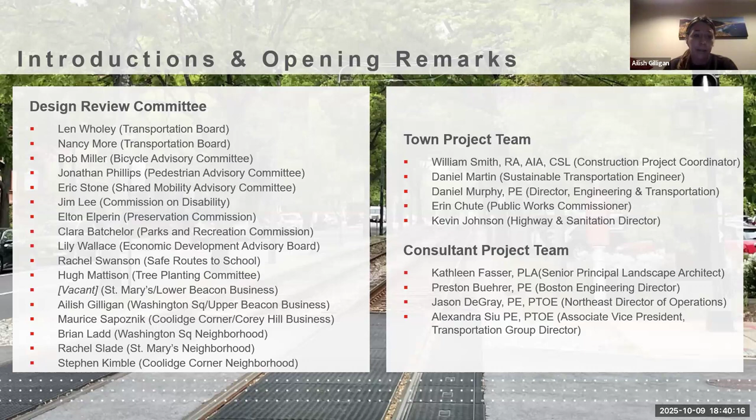Any other online members want to introduce themselves? Ailish Gilligan here, owner of the Public House on Beacon Street in Washington Square. I also live in Washington Square and am chair of the Small Business Development Committee as well.

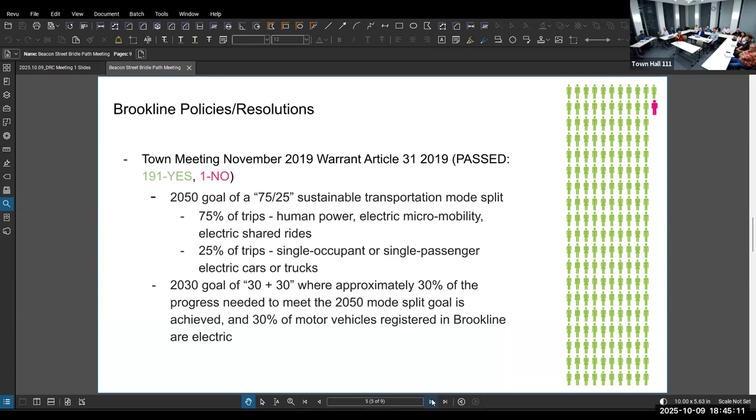But in order for us to realize those transportation goals, we need to address safety. A lot of people who ride bikes here mentioned they don't necessarily feel safe riding on our streets in Brookline, and there's reason for that. There are over 1,000 car crashes in Brookline per year, with over 100 resulting in injury. 30% of those injured are either people riding a bike or walking. So we have a lot of work to be done, and I think the bridle path is one step in the right direction.

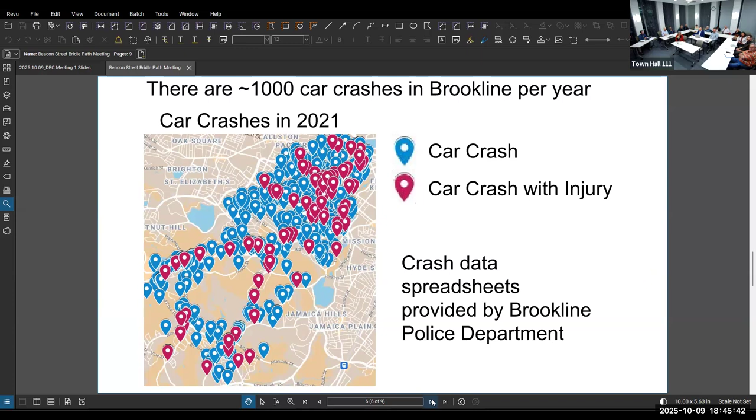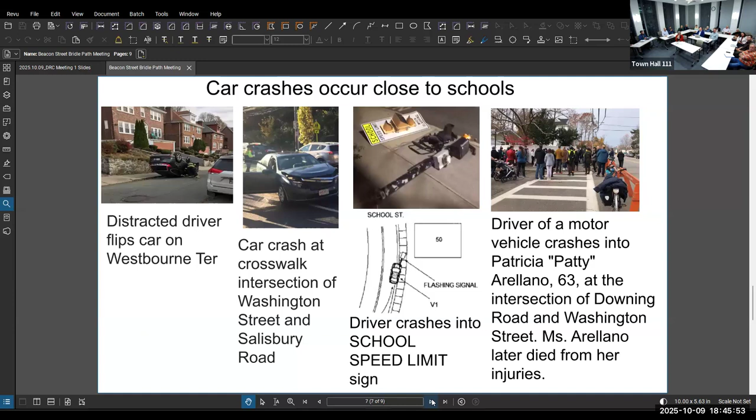Car crashes occur in close proximity to schools. There are a few instances where what's happening on the streets is just terrifying.

We can look to other countries as an example. France wants to be climate neutral by 2050, and they're taking action to realize that. In Paris, they've cut pollution in half, in large part due to significant changes to their streets and infrastructure to encourage cycling.

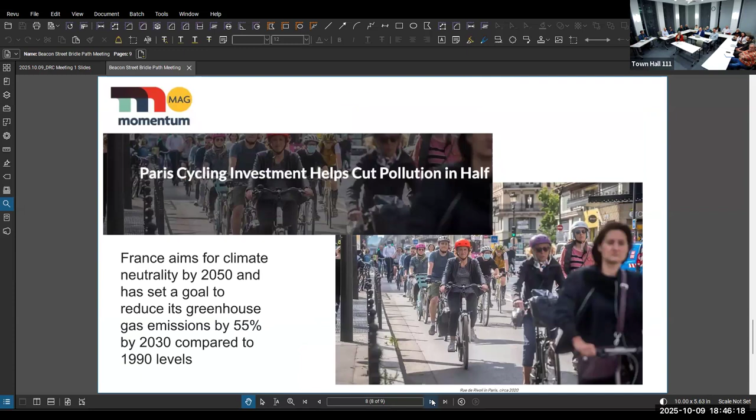I think Brookline is a place that sets goals and then achieves them. I think the Beacon Street Bridle Path will help us achieve our climate-related goals and also make kids safer and happier. I look forward to working with you.

Let me speak briefly to the town of Brookline's project team. Beacon Street is a public way, the nation's first intentionally designed multimodal corridor, designed by the Olmsted firm in the 1880s, and went through a lengthy public process of takings and widening of an earlier 1851 county road.

For this project, Brookline DPW brings an amazing array of support at the staff level. We have architects, landscape architects, engineers of various sorts, arborists. This will be a powerful support tool for the team and the public, because staff will provide significant technical advice. I think we'll be facilitating a lot of the public outreach and guiding the approval process through the different boards and commissions with jurisdictional interests along Beacon Street.

About the design team: we were very fortunate to be the recipient of a federal earmark, thanks to our legislative delegation, at a $2 million level. This, in addition to a town match, allowed us to go out in a public request for proposal process, in which Toole Design and their subconsultant HNTB emerged as the clear strong winner, and we were able to award the design contract to the team. We look forward to working with Toole, who has a national reputation for exploring alternative transportation modes, specifically bicycle and pedestrian, in all sorts of conditions and contexts.

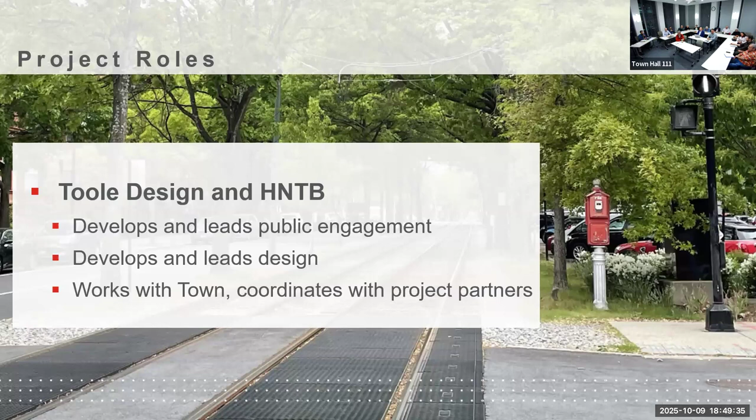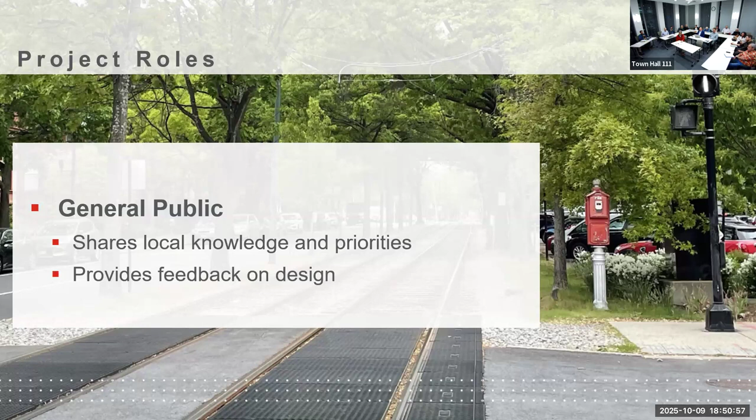I just want to emphasize the importance of public input. Each of our design review committee meetings will be open to the public. They'll largely be hybrid, so there will be the opportunity to attend in person or remotely if necessary. At each meeting, we'll have a public input or comment portion, either at the end or strategically placed within the context of the presentation.

Over the past several months, staff and Toole have been intensely engaged with MassDOT through their project review committee to gain acceptance of the Bridle Path project as a transportation improvement project in the Commonwealth of Massachusetts.

What this will ultimately do, we hope, is provide much needed construction funding for this project. So we're now in that universe.

Mass DOT Highway is the agency that facilitates the TIP process, and will be, together with the design review committee, working to develop what is called a 25% level plan set - plan specifications and a cost estimate developed to a 25% level that is submitted to Mass DOT for their review and approval. We'll have an opportunity to reply.

The result of that is a design public hearing that Mass DOT will hold in Town Hall and invite the public. In preparation for that, public support is key. They hope that the town has worked through any issues by that point at the design public hearing.

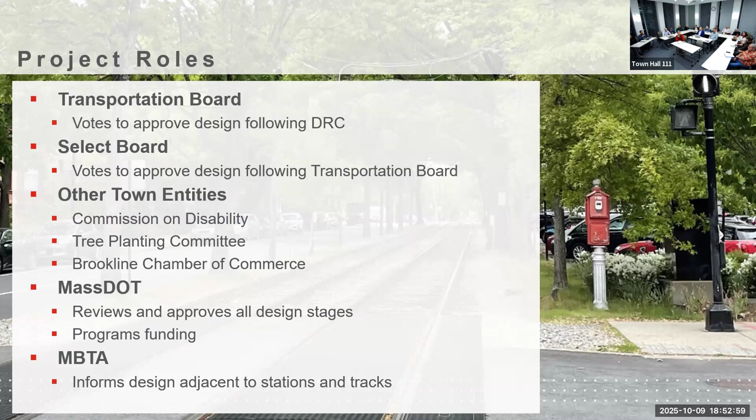So it will be important for us to have worked through the jurisdictional boards and commissions relevant on Beacon Street, such as the Tree Planting Committee, the Preservation Commission, the Transportation Board, and ultimately the Select Board. Next slide.

We'll turn this over to my colleague, Dan Martin. Sure. So the feasibility study was finished in 2021, and since then we've had a lot of new inputs that have come in.

The MBTA station accessibility improvements - they're widening 7 of the platforms to make it accessible and easier for train riders. So that's something we're considering now.

And right now there's also a survey, so all of Beacon Street is being surveyed: utilities, curb line, trees. We're also gathering parking data, traffic movements, parking utilization, and all that is going to be used to help come up with a design for this project.

On the next slide, I wanted to talk about the overview and the feasibility study. A lot of this was already covered earlier, but it did begin quite a while ago. In 2018, there was the town meeting warrant article, which was the non-binding resolution that called for the feasibility study on Beacon Street. This really started as a grassroots movement.

Jules Milner, who's in the audience here, used to be a Brookline resident. He championed this effort. He's since moved, but as you can see, he's still very interested in the project.

Then in fall 2020, the feasibility study looked at a number of options, and it took into its work looking at data, traffic volumes, stakeholder engagement, coordination with the MBTA, and then there was broad participation with town departments, advisory committees, boards, business representatives, and community advocacy groups.

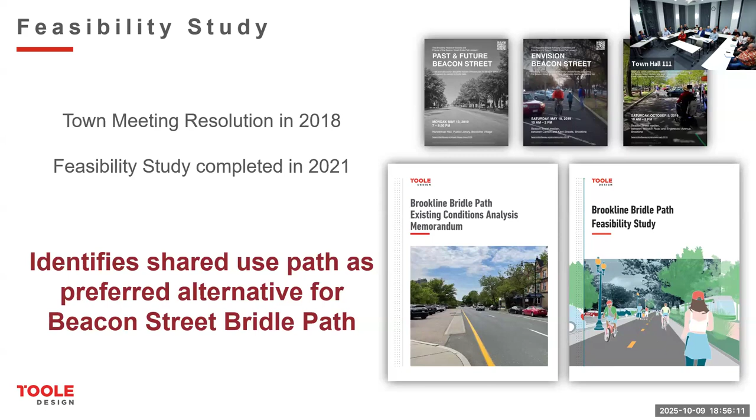With that in mind, I'm going to start with the feasibility study, recap some information from that, talk a little bit about existing conditions. Dan mentioned some new projects that will change our existing conditions, and then we'll move on to the design process and the engagement process that is to come.

Starting with the feasibility study, we're going to look at a couple of cross sections from that. This comes directly from that study, and this is typically Beacon Street today. I think we're all very familiar with it, but again, just to make sure we're all operating from the same frame of reference - we have Beacon Street starting left to right here.

On the left side, sidewalks - generously wide sidewalks, with a beautiful tree canopy along quite a bit of the sidewalk - parking in 2 travel lanes along the narrow side of the roadway. And then there's the center median, which is going to be the focus of our effort moving forward. That median includes the Green Line reservation, often buffered by those Olmsted tree canopy on both sides.

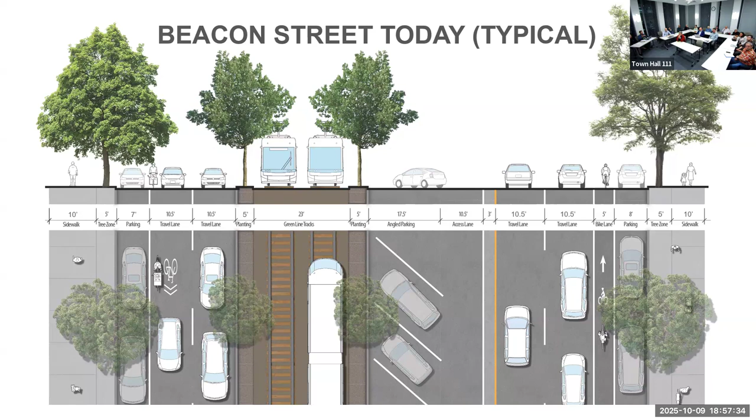Frequently on the wide side of the median, there's angle parking in an access aisle, sometimes with a concrete rumble strip buffer. Basically, there's a lot of space in the median between the MBTA tracks and the vehicle travel lanes. There's two more vehicle travel lanes. Frequently on the wide side of Beacon Street, there's a bike facility, unprotected next to parking, and then of course the sidewalks on the other side of the street.

As Dan mentioned, the feasibility study evaluated several alternatives and came to a preferred option for the Bridle path. This preferred alternative, in general terms, uses the wide side of the median to put in a shared use path and an additional buffer between the shared use path and whatever goes to the right of that on screen. As you can see here, the preferred alternative maintains the possibility to retain the angle parking that is in the median. We'll talk a little bit more about this in a few slides. And it maintains the two travel lanes on the right side of Beacon Street there.

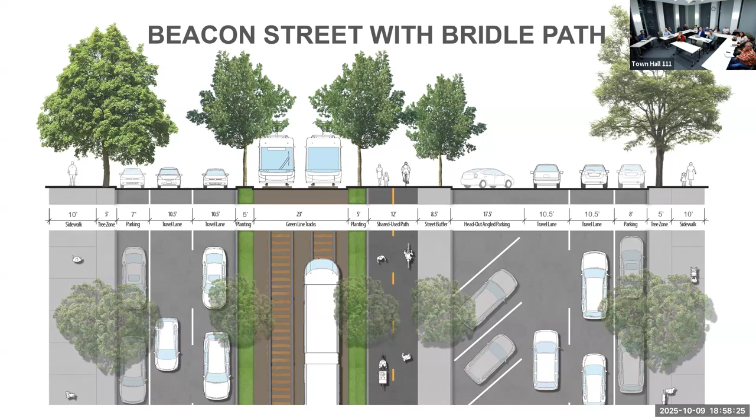So what does that look like along the entire length of the corridor? The feasibility study came to this concept plan, and I'm going to walk through the entire plan here in relatively quick fashion. It is online, it is available for everyone, and it is unchanged since this was published in 2021. But again, this will be our common frame of reference to start.

This section you see on screen here starts at the west end of the project limits over Ayr Road, right at the town line, and runs almost all the way up to Washington Square. On the right is a key plan, so you can see the part of the corridor we're talking about. You can see that we're breaking the corridor up into three sections to talk about tonight, which will also mirror how we are approaching the public engagement that is forthcoming shortly.

So a few things I want to focus on while we have the concept plan on the screen. The feasibility study was just that. It determined the feasibility of this project. It did not tackle nuanced design decisions. It identified many things that we have to consider, but it did not make concrete decisions about the nuances of design, aside from selecting that preferred alternative.

So when we think about things that are important along this corridor, things like trees, you can see the concept plan here does not detail anything in terms of where trees are, where trees might go, what might be impacted, what may be opportunities. That's in the cross section that is in the feasibility study report itself, but the concept plan doesn't get to that level. That's our charge here. That is what we get to grapple with. And we'll be collecting all the necessary data and talking about the design in those terms moving forward.

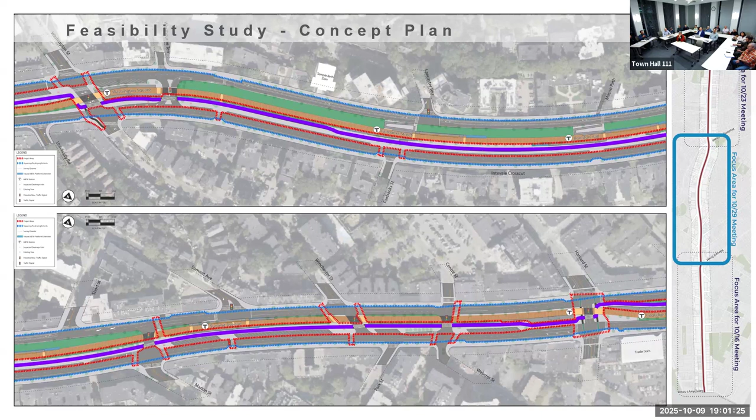Stepping through the corridor here, this section contains both Washington Square and Coolidge Corner. As we've cut the plan here, we know those are going to be our most challenging areas. I mentioned the path goes on the wide side of the median - the wide side of the median is determined by the MBTA tracks. Those tracks shift from one side to the other at Washington Square and Coolidge Corner. So those are areas where we know we're going to have to play around with some interaction between the path, the trolley, and traffic. There's going to be a lot going on. So just want to acknowledge that those are going to be real focus areas for us, certainly early on, as well as throughout the life of this project.

Continuing to walk through here to the eastern section of the corridor - I will note this is the first section of the corridor where we are going to be hosting a public talk and walk event this month. We'll talk a little bit more about those in the future, but just want to flag that this is where we'll be starting with the broader public discussion. A couple of other things I want to flag here that we know we're going to need to consider, but again, aren't necessarily represented on this concept plan yet.

We know we're going to need to think closely about access to the path, what those access points look like, where they are, what the treatments are that get people to and from this facility. We know we're going to need to think about pedestrian scale lighting to ensure this path is safe, welcoming, and just a wonderful environment at all times of day. We know there's quite a lot of utilities in the median that we're going to have to consider.

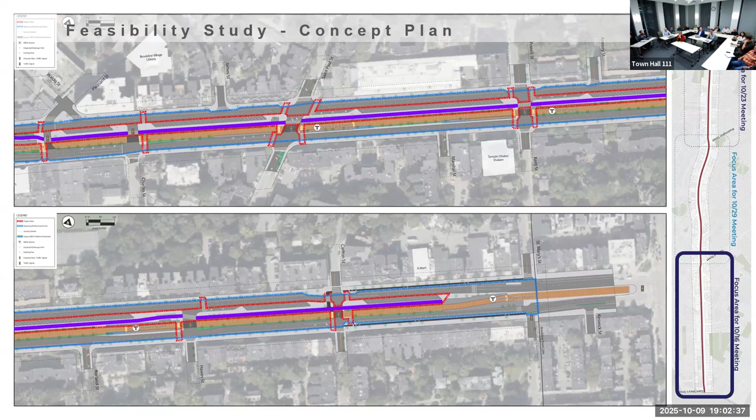There's a few other things I'll touch on in a little bit in terms of existing conditions, but I want to emphasize this as our starting point, a wonderful starting point, but just that it is what we get to build upon here. The feasibility study looked closer at some of these challenge areas. At Coolidge Corner, the most prescient thing from this image is just above and to the right of the Harvard Street intersection - those two westbound travel lanes where the path is. This is the tightest spot on the corridor, an incredibly challenging area for us to deal with. We recognize that, and we're excited to find solutions, but this is going to be one of the things we tackle early on.

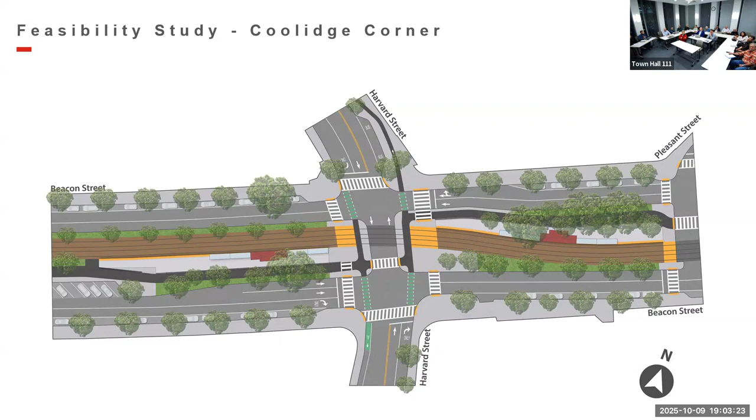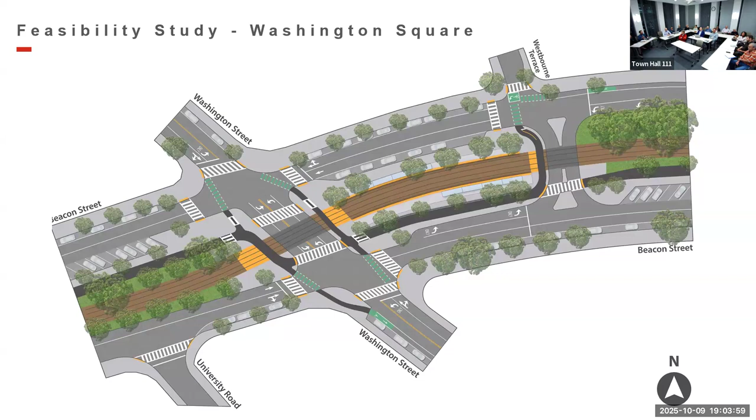Continuing along to Washington Square, the other area where the path is going to have to interact with that MBTA reservation, switching back to the other side of the median. This is an area that's going to have some complex traffic operations. Also, since this feasibility study, there's the initiation of the Washington Street project - another condition we're going to have to think about as we move forward. So really two very exciting areas, vibrant commercial hubs. We really want to tie the path into them, but areas we're going to have to think about from the get-go.

Continuing along, I think this is the last section I have on the feasibility study itself. The feasibility study really took to heart the Olmsted vision for this corridor - the green corridor it is, the multimodal corridor with this beautiful, historic tree canopy that exists. And it proposes quite a few different ideas that could be considered, both to reflect that historic nature and existing tree canopy, but also to be forward thinking in terms of how we deal with climate change and what strategies could be implemented along the corridor. So it gives us a lot of things to consider as we move forward and collect more data.

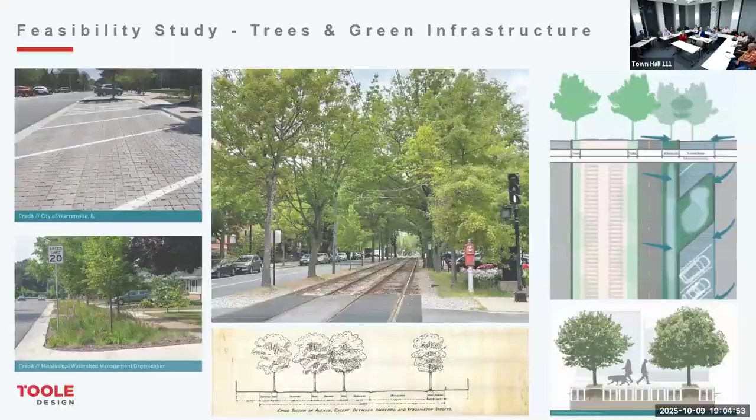So I'm going to move now to the C-Branch project. My goal here is not to re-say everything that the MBTA has already presented to the select board, but I do want to bring this up in the context of the Bridle Path project. Bill mentioned we've been in contact with the MBTA - we've been working with them for quite some time. Before this design project even initiated, the town has been working closely with the MBTA to ensure that these two projects, which are very important in their own rights, can coexist and improve conditions out on Beacon Street.

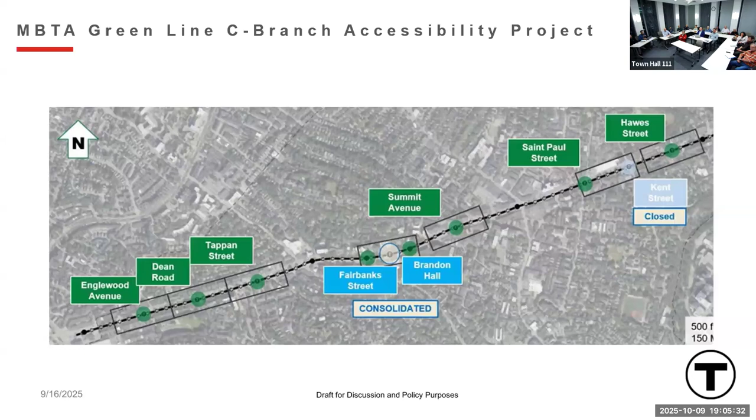So I'm going to touch very briefly on a few things we want to be mindful of as the MBTA comes into their station project. One of which is access points. We know that the MBTA will be evaluating access points to and from their stations, in some cases adding new access points where required to provide two means of egress from their stations. So it's something we have been and will be in very close contact with the team about, to continue understanding such that we are able to connect to those critical points and plan ahead for them.

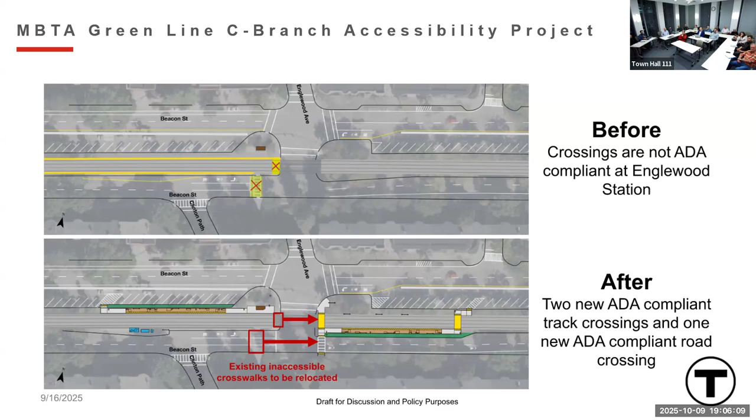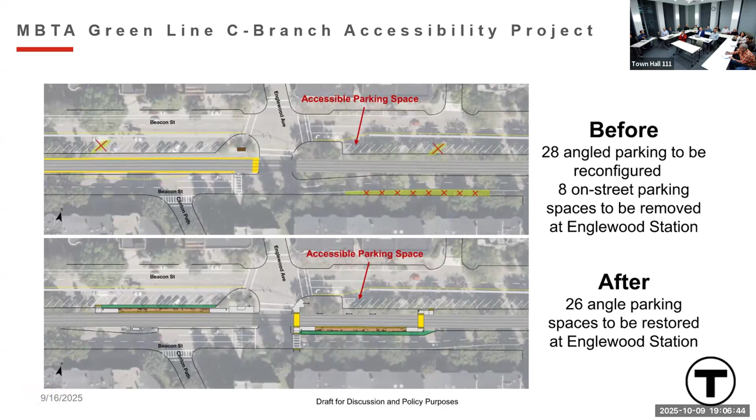We also understand that the MBTA's project will have some effects on the on-street parking, whether that be the median angle parking or the curbside parking. Throughout this project, we will be clearly tracking the impacts on a block level basis. So block by block, we will be able to speak to what is out there today. The MBTA is accounting for their impact, and we will have clear diagrams and information on what our potential impact is.

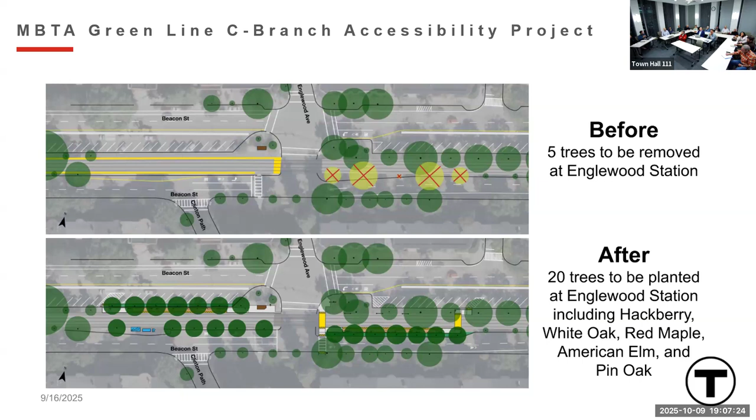And lastly, trees. The MBTA will unfortunately impact some trees along the corridor. I think one of the real positives we've seen from our work with the MBTA has been the ability to get tree lawns put in with their stations, providing an opportunity to start replenishing canopy, growing new canopy in an area that the Bridle Path project will not have to disturb. So we will be able to start improving that canopy, replacing canopy where needed in a fashion that won't disrupt the Bridle Path project that has really been pre-planned for.

So with that, I want to transition to talking a little bit about the scope, both of this design team, that again, we're very happy to be here today. So talk a little bit about what's on our plates and then talk about the scope of the project more broadly.

In terms of the Toole and HNTB team that Bill mentioned the town was able to retain, we have been under contract for the majority of this year. We have started project initiation with Mass DOT to ensure that this process is moving. We have started gathering a lot of existing conditions data. I'm going to talk about some of that in more detail in just a second.

We are starting our public engagement process in the moment, and really will be off to a full-throated start throughout the month of October. We will be shepherding this project through the MassDOT design process, ensuring that we are checking all of those boxes, making sure we're not being caught off guard by some DOT requirement that's going to hold us back, identifying things proactively and moving this project forward.

We're also coordinating very closely with the MBTA, not just on the stations, but also to ensure that what we proposed as part of the Bridle Path project works for the MBTA. It's not something that we want to run into barriers with somewhere down the road. It is our responsibility to proactively coordinate.

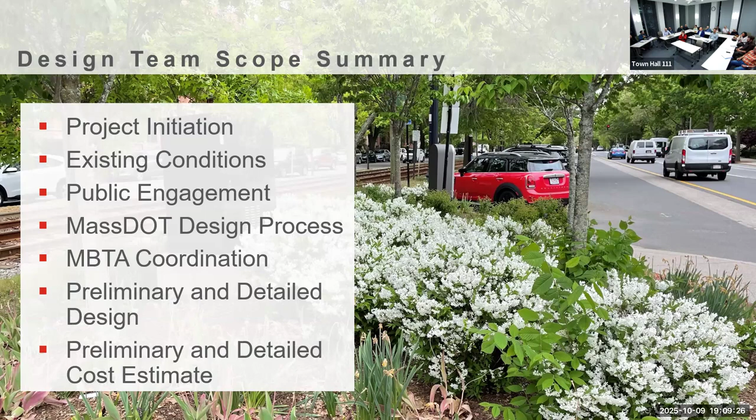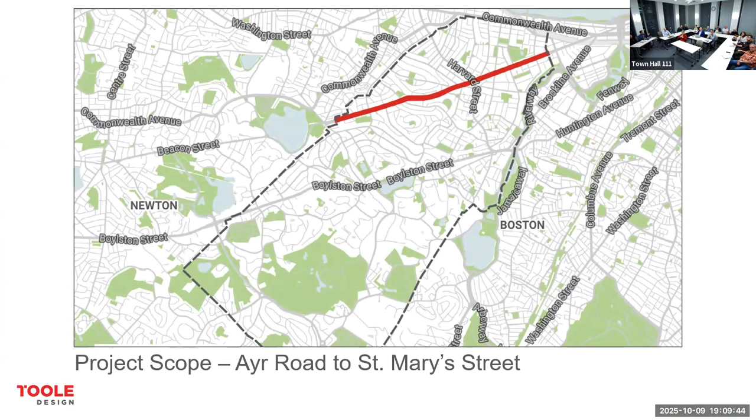Talking a little bit about the project itself, we are talking about the entirety of Beacon Street within town limits. So that is Ayr Road on the west and St. Mary's Street on the east. Full stop - it is all of Beacon Street within town limits along that center median.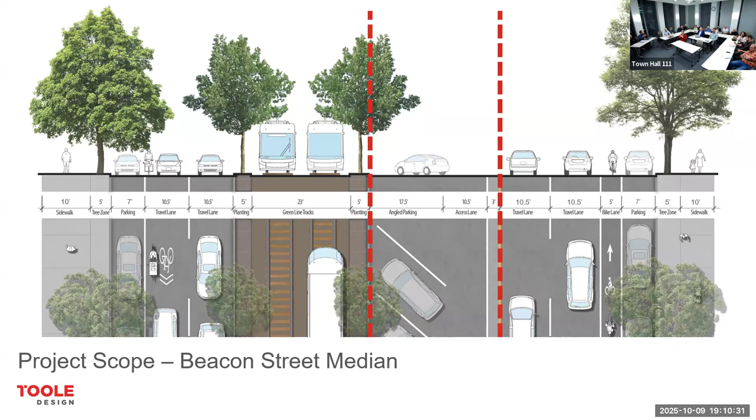When we talk about this, our primary project area that we are considering here is that median. This is where, as we saw before, the bridle path goes in. It allows us to add that facility and consider what the additional space within the wide side of the median can be used for. Of note, we are always staying to that wide side of the median. Part of what the feasibility study looked at, in terms of holistically where different transportation facilities go on the corridor, the preferred alternative from the feasibility study was the shared use path on the wide side of the median.

So looking a little bit more closely, this is a zoom in to that concept plan I had up before. I think this will be helpful in setting expectations for that project limit. The red dashed outline here are the project extents - we're looking at the median from the MBTA tracks to the vehicle traveled way. That's the area we are playing with for this path.

And critically, we are also including all of the crossings to and from the path on both sides of the street. We want to get this facility in, and we recognize the critical need to make those connections as well. Outside of that area, Mass DOT has committed to a mill and overlay of all of Beacon Street to go with this project - that's the dashed outline you see there in blue.

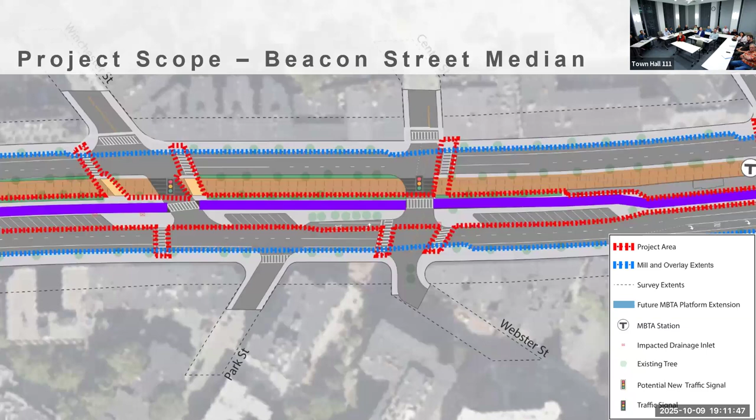For some eagle-eyed viewers, I recognize it's a little faint, but there's a black dashed outline as well - that's the extent of our topographic survey. So when we're collecting existing conditions data about what's out there on the street now, we'll go a little bit past Beacon Street in all directions to make sure we have the information necessary to design the project.

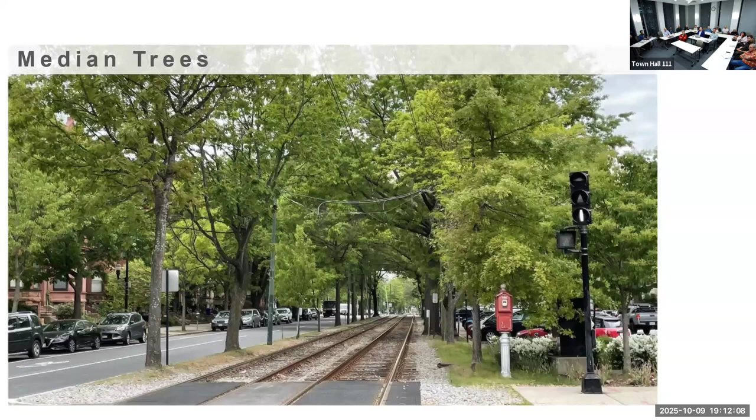Let's talk a little bit about those existing conditions and start with the trees, right? Beautiful tree canopy. We recognize that this is an incredibly critical component of the street and a very historic component of the street. So when we think about trees, we're going to be thinking about them both in that canopy sense as well as in an individual sense.

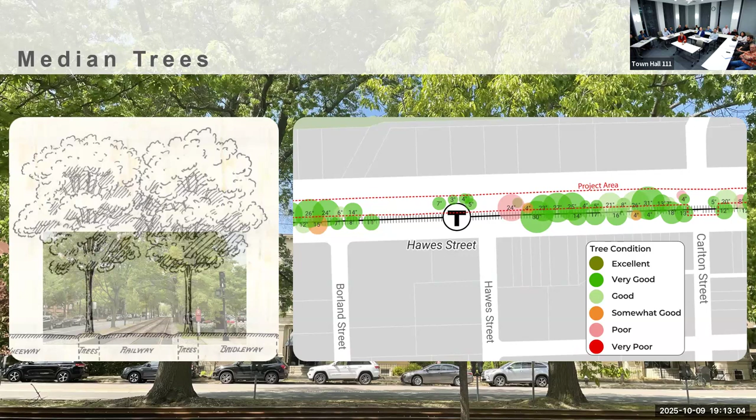We are starting with the tree inventory that the town is maintaining. The MBTA has also collected additional tree inventory data. We will be taking in this data as the project moves along to ensure we can speak accurately to the opportunities and impacts that may come with certain design choices. The snippet on screen is a clip of a much larger plan that will be presented at all three of our public meetings, where there'll be the opportunity to really investigate the data we have on the existing trees in the median.

Similarly, the parking along Beacon Street is another area where we've been collecting data to ensure a rock solid foundation for our design process. The town completed an inventory of all on-street parking along Beacon Street, including the parallel curbside parking on the north and south side of the street, as well as all parking in the median, whether angled or parallel. In total, there are 1,264 spaces on Beacon Street.

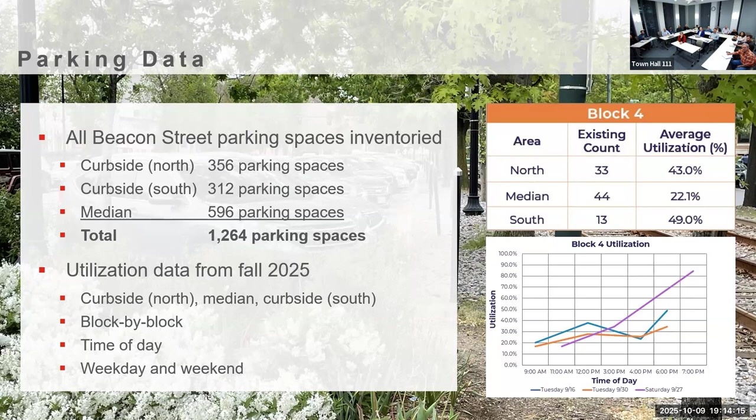We have also collected utilization data of that parking in fall of this year, within the past month or so. That data is broken up by the north curbside parking, median parking, and south parking, and further broken up by block, time of day, weekday and weekend. You can see a portion of that data on screen. We have a lot of ground to cover today, so I'm not diving into all of it, but it will all be available, and we will track this and speak accurately and clearly to it throughout the project.

We have also collected a significant amount of operational data. What do I mean by that? We collected counts at 20 intersections along the corridor - how many vehicles, bicycles, and pedestrians go through each intersection, broken up in 15-minute chunks throughout the day. We also collected 6 corridor counts of vehicles traveling along Beacon Street, including bicycles, giving us volumes and speeds at several locations.

For the crosswalks that are not near an intersection, we made sure to count those too, getting pedestrian and bicycle counts for everyone using those crosswalks today, even away from a signal. On the right you can see some high level takeaways. Beacon Street is 2.25 miles long, so it varies quite a bit, but traffic ranges from about 14,000 to 21,000 vehicles a day. The 85th percentile speed - the speed at which most people are traveling at or under - is 23 to 33 miles an hour. It's quite a spread.

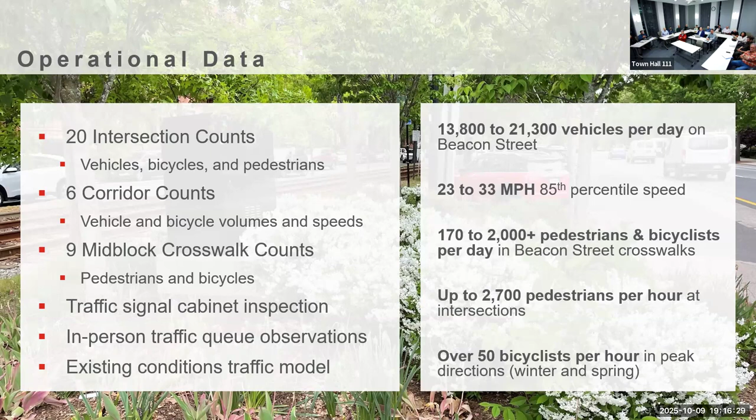There are anywhere from 170 to over 2,000 pedestrians and bicyclists using crosswalks along Beacon Street every day - that's 2,000 people in a single crosswalk per day. At some intersections, we see upwards of 2,700 pedestrians crossing all the crosswalks within 1 hour alone, so we see incredible usage by all modes of transportation. Our counts, collected in winter and early spring, also had over 50 bicyclists per hour in the peak direction. So despite the lack of consistent bike facilities and the colder time of year, we still see significant bicycle use on the corridor.

Talking a bit about the remaining existing conditions elements we want to hit on today: as mentioned before, this is a historic district, and that character is incredibly important in the design we come to here. In terms of existing median facilities, there's not a consistent sidewalk - a lot of times there are goat paths in the medians. There's also utilities throughout the median: light poles in the parking areas, electrical cabinets, EV charging. There's a lot going on that we'll need to think about in terms of what needs to move around or move for the path.

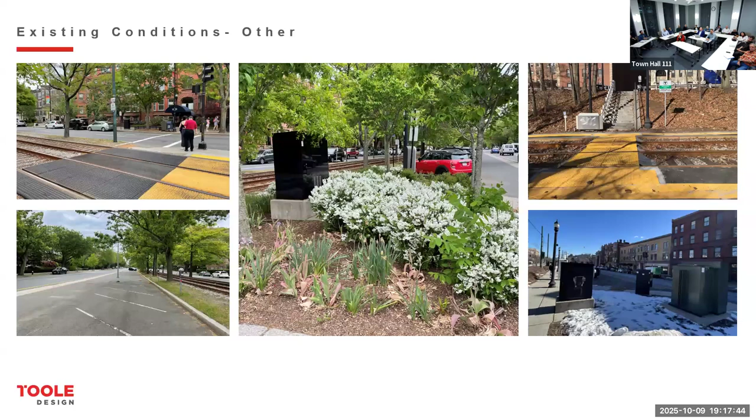There's going to be competition for space, some mixing zones. We know these crossings, these commercial areas, are places people love to be, so there's going to be a lot of people, and we'll need to think thoughtfully about how they all interact with each other. And of course, in the middle section of the corridor, we have steep slopes - that embankment between the upper and lower portions of Beacon Street.

So it's quite a lot to consider. How do we consider it? We'll keep our wits about us and talk intelligibly between the design team and DRC, and with the public. This is where our thinking has been recently, and this is how we've started our design process. I'll throw it over to Kathleen to walk through what we're thinking for these design topics.

Thanks, Preston, and to give him a break because he covered a lot of information. I'm not really extending the presentation here, just wanted to jump in and frame everything you've heard. As some of you have been part of the MBTA station design presentations, anything along Beacon Street is a lot to cover. We've briefly summarized our scope, the existing conditions, and our roles and what we have to think about tonight. We know it's going to be complicated, so we thought through how to have these conversations, not just with you as a design review committee, but also with the public - how to break everything down into bite-sized pieces and focus attention on certain topics along the way.

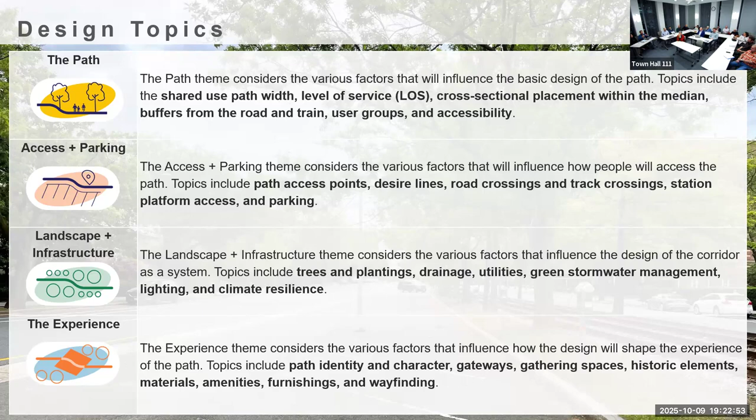Okay, so as Kathleen said, this is where we leave things in terms of the design process. I'm going to take us through a little bit of the schedule now, and then we can move to open discussion and an opportunity for some questions and answers.

Moving on to the schedule, just taking a quick view at the work that's been done, acknowledging the start that predates this design team and this specific design review committee - the fantastic work that laid the foundation for everything here today. More recently, we've initiated the project with MassDOT, as Bill mentioned. This team has been taking in all the planning documents, the townwide and region-wide planning documents that will inform this design process. We've collected traffic data that I mentioned, and we're collecting crash data. Len shared some data - we're looking at a quite comprehensive data collection program for the crash data.

The internal design workshops, that's how we came to this framing of design ideas. That's what we've been focused on: how do we talk about the project, how do we frame our design ideas. We've not started the design yet.

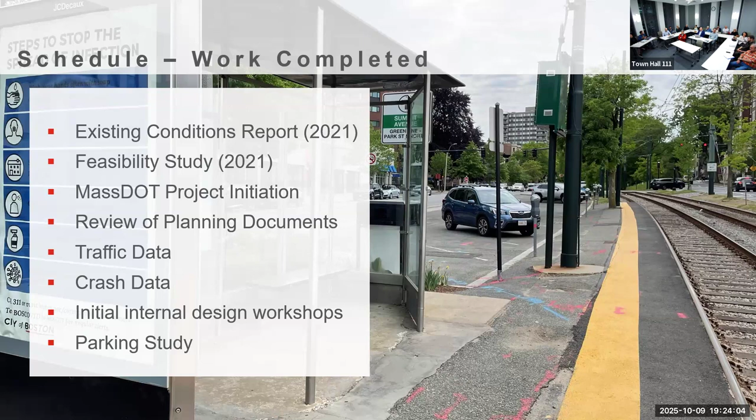Then there's the parking study, which includes the inventory and data that was collected, and the crash data collection, a quite comprehensive program that's ongoing. We're working with Mass DOT to establish exactly what timeframes are needed there. They have a very rigorous process for that.

We have our ongoing topographic survey, creating a base map for ourselves that includes everything out on the street today - every sign, every curb, every sidewalk, every stripe line. That's ongoing and we hope to have it wrapped up by December. MBTA coordination is ongoing, has been for some time. Public outreach we are starting today and will have ongoing moving forward, and the same can be said for the DRC coordination.

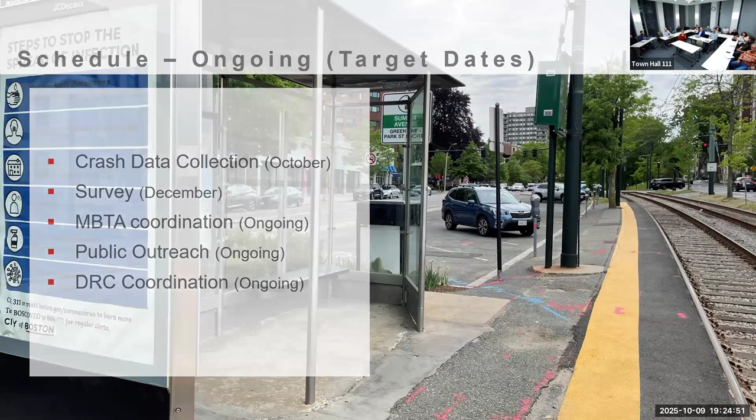On the front of public outreach specifically, we have our first set of public engagement opportunities coming up this month. They're on a roughly weekly cadence starting next week. So we are hosting a series of 3 talk and walk events.

These events will have a half-hour opportunity at the beginning for folks to convene and walk out briefly to a spot in the corridor and take in Beacon Street, with some informal discourse with the project team on Beacon Street for about half an hour.

And then from 5:30 to 7:30, there will be an open forum at the locations listed here with stations to take in project introduction and project existing conditions - a lot of the information you just saw here in a bigger, richer format, as well as to dive into those key themes that Kathleen just discussed.

We're going to have stations set up for each of those to really share out to the public the data that we have as a starting point, precedents that we have, and take in from them what are design priorities, what are reactions to those precedents, to the data that's out there. So we'll do that 3 times.

As I mentioned earlier, it's broken up into 3 sections of the corridor. The first section being the St. Mary's neighborhood, so that'll go from St. Mary's Street to Coolidge Corner, including Coolidge Corner. The second one will be from Coolidge Corner to Washington Square, inclusive of both. And the last one will be from Washington Square all the way over to Ayr Road.

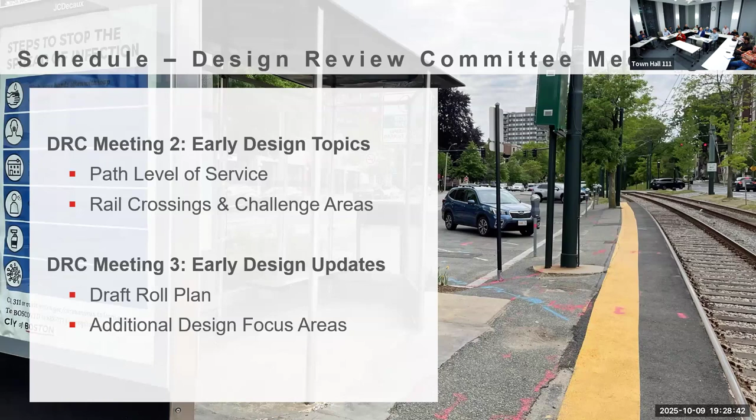And so in terms of schedule for those, we anticipate this being a winter into early spring push. The next slide gets into some remaining schedule items that are driving this. Because of some of those remaining schedule items, there is a little bit of uncertainty in when the next meeting date will be. We have a road safety audit with Mass DOT that will take some time to schedule.

So we want to put a couple of dates out on the calendar as potentials, and we would ask if this group is able to hold those dates. We can certainly discuss this in the Q&A session if there's additional need. But broadly speaking, what we have here represents the fourth Thursday of every month.

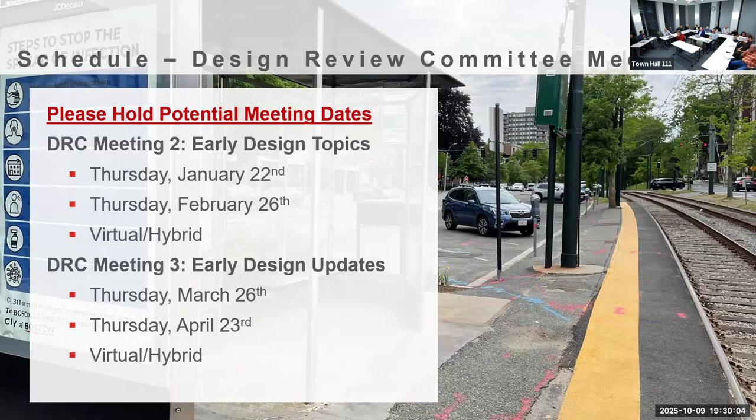As was mentioned before, this hybrid virtual format is what we anticipate moving forward. I certainly value the opportunity to interact with all of you in person to the extent that it's feasible and practical for you all, but really appreciate that everyone came out today, as well as everyone that joined online. I appreciate you all taking your time. I think we find a lot of value in this, so we see these meetings continuing forward in a similar fashion.

Talking about those remaining items to get us through to the early design process, we have a road safety audit that we will be scheduling with Mass DOT. This requires assembling an incredibly long list of state and town officials. That is our schedule uncertainty at the moment. It's going to take us some time to pull together that list with the finalized crash data for a meeting.

On the positive side, because of the lead time associated with that road safety audit, we do anticipate being able to give weeks, if not months, of notice on those potential design review committee dates. So again, we would ask if the team is able to hold those, that would be greatly appreciated. We will give generous advance notice on the next DRC meeting date.

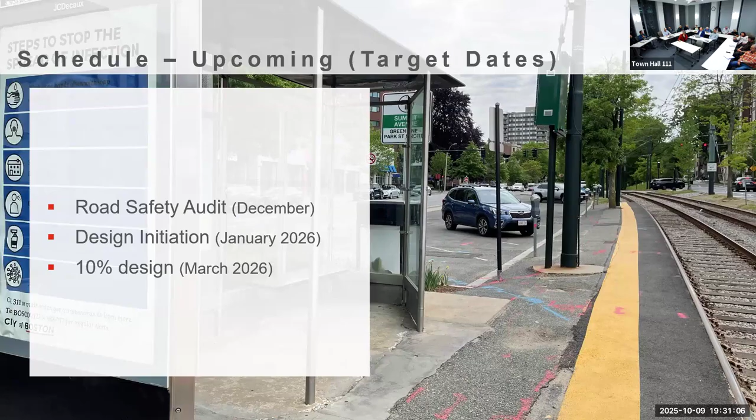And that is just about everything we have today. We didn't do too bad in terms of time there. So yeah, I would be happy to turn this back. Glenn, I don't know if you wanted to kick things off with any comment or facilitate a question and answer session.

That was great. Thank you, Preston. Thank you, Kathleen. Very detailed and thorough, and we have a lot of work ahead of us, it seems. I don't have any questions at this point. Does anyone else have questions?

Nathan? Yes, I have lots of questions, but I'll try to keep them short to make sure everybody gets an opportunity. My first question is, I don't have a sense of what it means to say 10% design, 25% design. Could you give a very quick idea of what that means? Like what decisions have to be made, I just have no sense of what that means. Sure, I'd be happy to.

So 10% design is really the first point at which we have a detailed layout of the full corridor. So the concept plan that was on screen earlier, that was the entire corridor laid out in plan view. 10% design provides us the opportunity to do that with more detail of the intended plan, as well as more existing conditions detail. At that point, Kathleen mentioned level of service for the path. How wide is the path? We want to be thinking about that. What are our critical access points? A lot of those big, broad decisions are made at the 10% level.